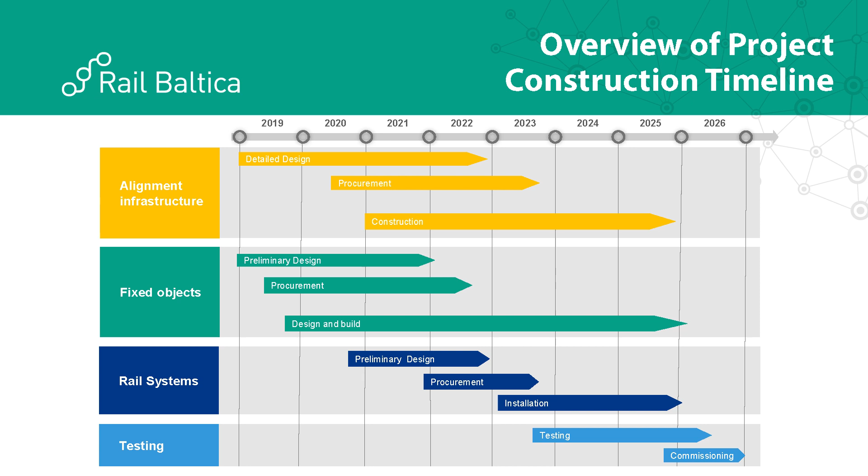And then we get on to the final phase, the testing and commissioning. This will be done in stages, in incremental parts, until we can test and prove the entire railway, and then we can start operations in 2026. So that's an overview of the project as a whole.

Now let me try and explain a little bit about how we're going to build it. As I mentioned, the design really drives how we get to the alignment construction. So let me talk you through that first. So we have alignment design contracts, as has already been mentioned, for the entire railway from Tallinn in the north to Kaunas in the south.

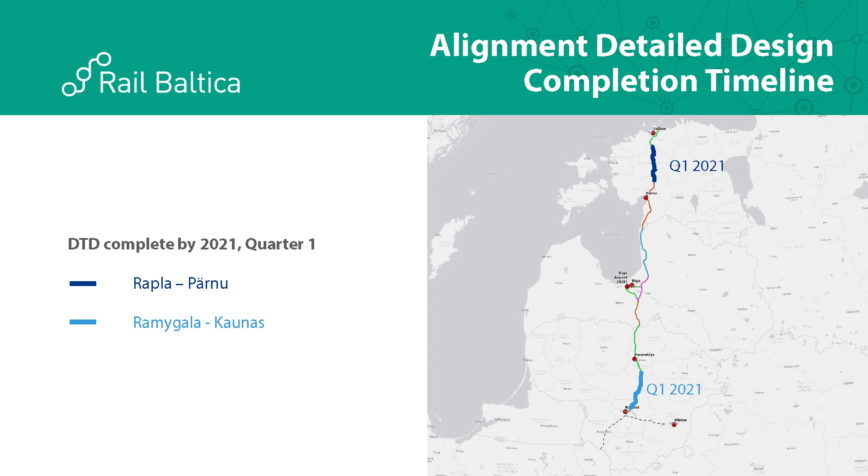The first sections of the detailed technical design, or DTD, will be completed in the first quarter of 2021. This is a section in the south from Kaunas heading north and a section in the middle of Estonia. These are the two areas where construction will commence once the design is complete and we can get the permits. Now, the permitting and approval process varies a little bit by country, so the timing of when we'll start construction will vary a little bit, but these are the first two areas where we'll get going.

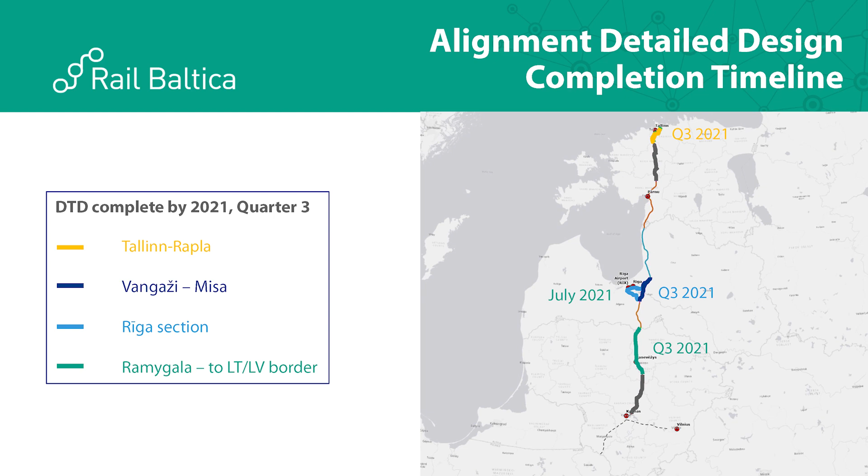6 months later, we'll then complete the design for 4 more areas, 2 in the middle of Latvia around the Riga area, the northern section in Estonia connecting into Tallinn, and then the other section in Lithuania connecting all the way up to the Latvian border. So we'll be moving into the construction phase on those areas in the next wave.

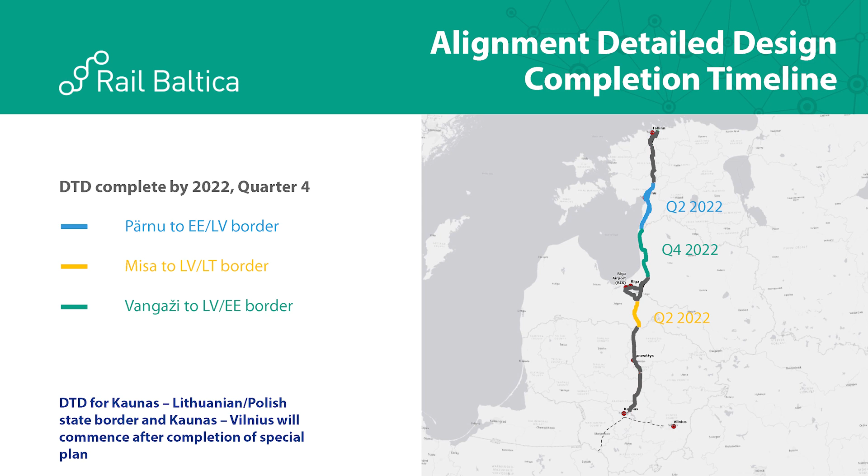And then finally, for the end of 2022, we will complete the design along the entire line from Kaunas all the way up to Tallinn, allowing us to start letting construction packages for the works in the rest of the areas as well. So that's the kind of sequence on how the alignment construction will roll out, starting where the design is complete and then carrying on as the design completes in other sections.

Now, I mentioned this is from Kaunas to Tallinn. There are 2 other sections of the line for which, as Agnes mentioned earlier, special planning is ongoing or is being planned right now. So this is from Kaunas down to the Polish border and also from Kaunas over to Vilnius. So once the special planning is complete for those, we can start the detailed design work and then move into construction on those sections as well.

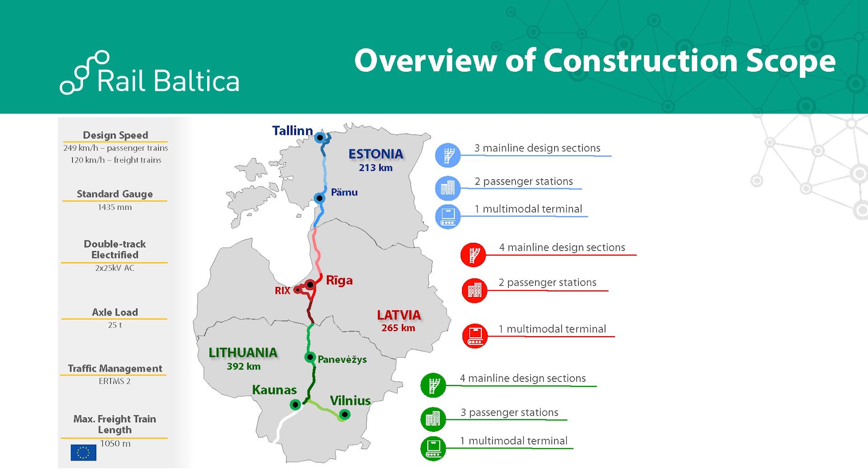So that's how the design work is going for the alignment, but there's a lot more to the project than just alignment. So this gives an overview of the project as a whole, similar to what Agnes mentioned, but maybe in a little more detail. So we've divided the line up into sections, and those are the sections I've just run through. But there are a number of fixed objects as well. 2 passenger stations in Estonia, 2 in Latvia, 2 on the main line in Lithuania, and another one in Vilnius as well. We have multimodal terminals spread along the line, and we have maintenance facilities and control centres as well. So there's a number of different objects in addition to the main line that all require planning, design, construction.

And then of course there's the rail systems. We'll have signalling, tracks, communications and all of the other systems needed to operate the railway. So this is kind of the whole scope of what needs to be delivered in the 3 Baltic countries. But it's not just in the Baltics. Rail Baltica connects to Poland and to the rest of Europe as well.

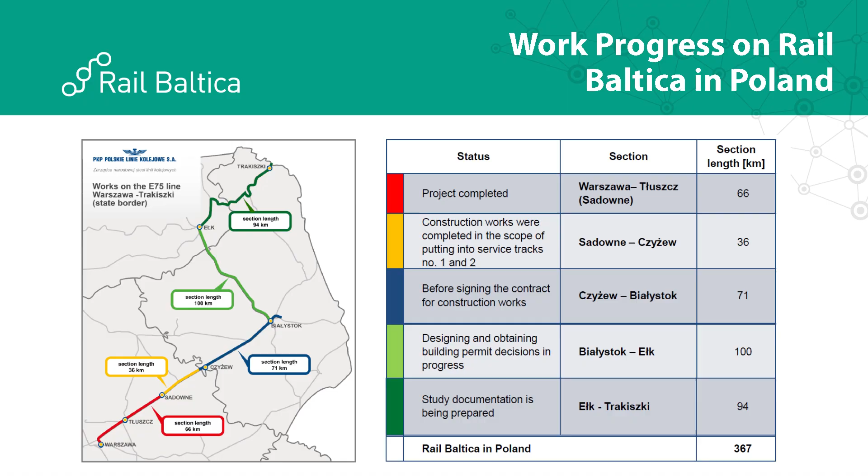And so in parallel with what we're doing, our colleagues at PKP PLK are delivering the Polish elements of Rail Baltica, and their work is progressing really well. The first section from Warsaw northwards is already complete, and planning and construction is ongoing for the rest of the line. They have about 360 kilometres of alignment to deliver, and it's well underway. It will connect at the border, allowing trains to run all the way from Tallinn through to Warsaw and beyond into the rest of Europe. So this is a key part of the project. It's the link to Warsaw and beyond.

Now we're working closely with our colleagues in Poland to ensure that all the interfaces at the border work, the signalling system works across the border, power supplies are uninterrupted and so on. So trains can run effectively all the way across Europe.

So for the bit above rail, the systems that we're delivering, we're currently in the stage of developing all those systems, and they'll lead to contracts for system-wide systems as the design progresses. But the bit that requires the main focus now is the infrastructure. So from the track down, that's where the focus is, the construction side, and that's where the design focus is right now.

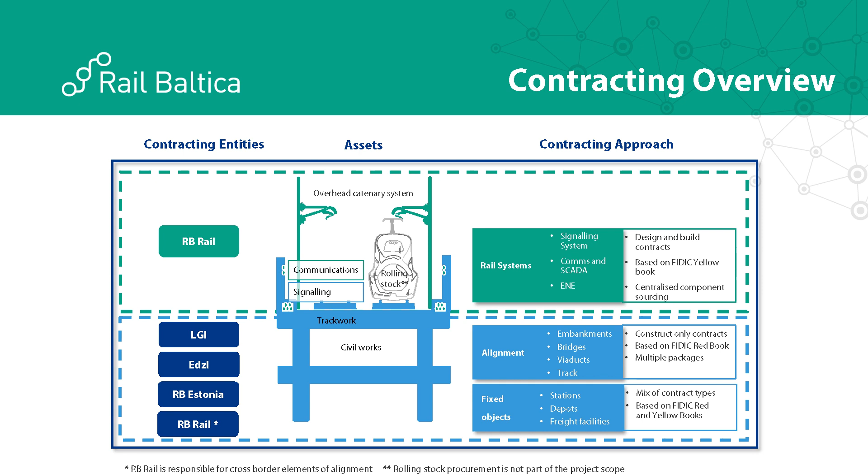Because of the scale of the project, we've identified the opportunity to maybe do some centralised sourcing of various elements of the project. And these will be centralised through large procurements where they provide benefit to the overall delivery. So RBRail will be rolling out a centralised procurement approach for key elements; these will be things like the track, the ballast, and elements that are repeated numerous times along the line where we can really get some economies of scale.

We started the consultation on this. Last week we had a number of very useful sessions with suppliers of all the different track elements, sleepers, fasteners, ballast and so on. Those consultations have really been useful to us and help us moving forward rapidly in putting together these centralised procurements so we can get these elements delivered to the implementing bodies.

Now, let me switch to what we're doing in the short term over the next 18-24 months in each of the countries. Firstly, in Estonia, the main focus here is fixed objects. As Agnes mentioned, they've started on the stations, the design work will commence on those, and we're going on with a number of other fixed objects as well, freight terminals, depots, and we're also looking at a dry port too. So a big part of the focus in Estonia is going to be fixed objects, but things are going to carry on the alignment as well.

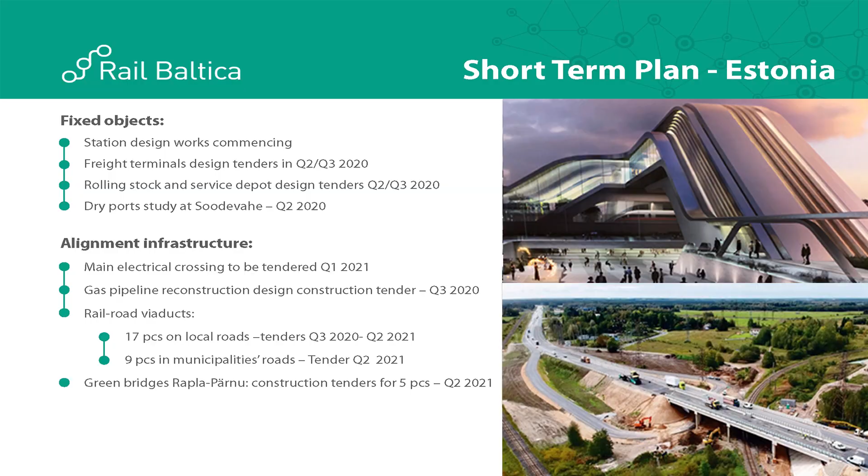Some construction has already started on some railway bridges, and this will carry on. There's up to 17 more that we plan to tender out in the coming months. There are also a few green bridges that we need to get started on as well. And there's some really big utilities we need to get moving on. There's a gas pipeline, there's some big electrical crossings that we need to move as well. So we'll get going on tendering these, getting these utilities moved in the near future as well. So that's what's going on in Estonia.

Let's move to Latvia. In Latvia, the focus is very much on the stations, as has been mentioned already. Riga Central Station is really complicated, and for that, the design and build has already been let and the work's progressing. But there'll be a number of other packages of work needed as well to support that. We will then let the contract for Riga Airport Station, which is also quite complex. Anything linking to an airport is always quite complex. So the procurement for that's ongoing.

We'll also need to procure some supervision services to oversee this as well. And I guess that's something worth mentioning for all the construction packages. In addition to the construction works, there'll also be consulting services which we'll need to provide, some of the engineering supervision services during the construction phase as well.

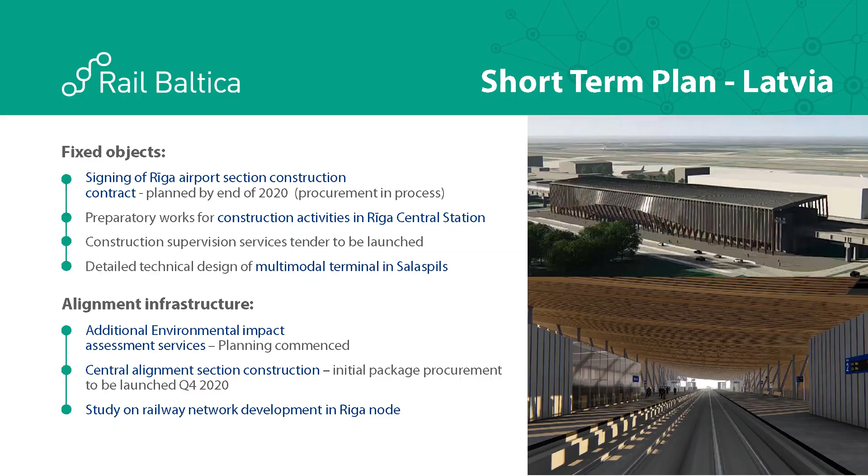From the alignment point of view, we've been doing a lot of value engineering on the alignment in Latvia, and there are a few areas where we think we can provide a better solution. But if we do that, we'll need to reassess environmental impact as a result of the changes. So we're going through that phase at the moment. But the alignment in the centre section, we're getting close to being able to start construction. And so some packages where the design isn't going to change, we'll be able to start the procurement process by the end of this year.

Then finally, in Lithuania, as you heard from the Minister, the work here has already started in the Kaunas area, and there's a section under construction, which is great news. There's more development going on around the infrastructure maintenance facilities in these areas and everything else at Kaunas node.

So that's really good to see. Work's going to start on the main line from Kaunas going towards the Latvian border next. You may have noticed in the news last week, the Lithuanian implementing body LGI has started this procurement process. They started doing a market consultation on the first lot of this, which is around about 475 million euros worth of work. There are 9 lots planned to be let for the first 59 kilometres of this alignment.

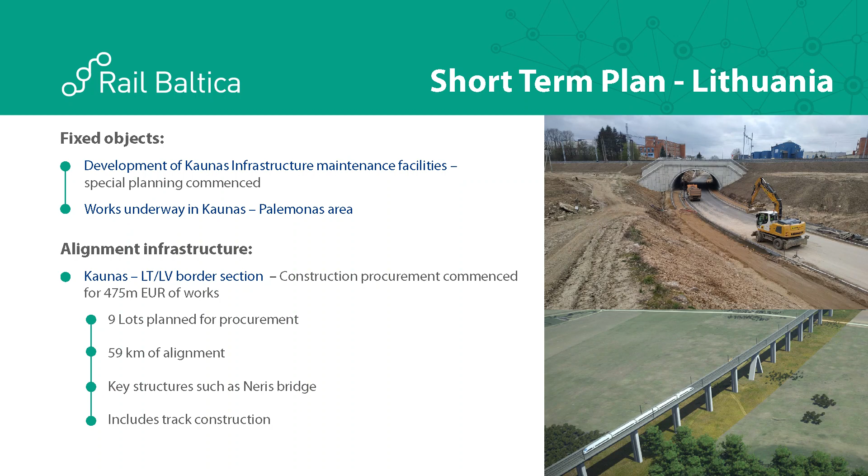Most of it's embankment and a few small structures, but there are some other structures as well, including a bridge over the Neris River, which will be included in here. And as I explained before, to use this infrastructure, we've also got the track installation as well. So within all these packages, there will also be a package for the track installation. So as you can see, the alignment is moving forward fast, and the procurement phase is really starting on construction in that area.

So that's it for the civil elements. Now we turn to the rail systems, which are moving fast as well. Recently, we launched a tender for the engineering services for the ENE, the electrical supply system, overhead lines and so on. Later in the year, we'll be doing the same thing for the rest of the systems, the ERTMS, the communication systems, and all the other rail systems that are needed to operate the railway.

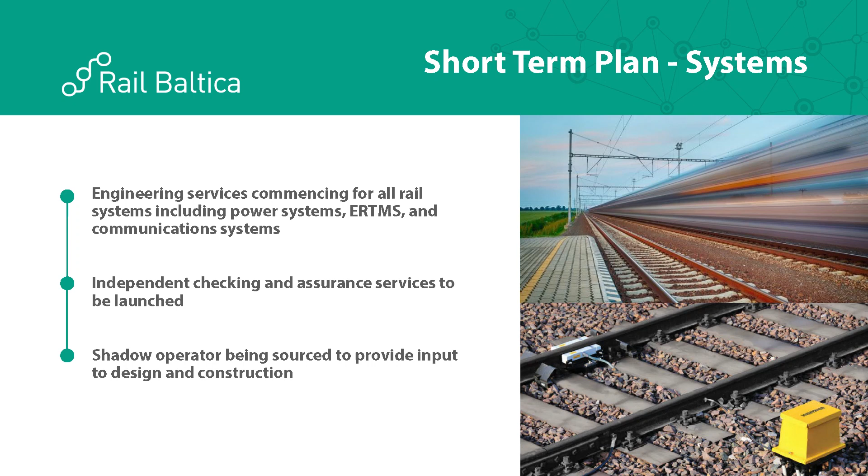We're also getting on board all our assurance and independent checking. So we've been out to tender for a NOBO, and we'll be doing this with other areas going forward later this year as well. The other thing we want to get on board is a shadow operator to help us to provide some operational input into the design and construction of the railway, and so we'll be seeking one of those in the near future too.

Finally, I'd like to come on to the subject of one of the questions, the different contracting options that are under consideration. There are three different ways we're looking at contracting for the main construction works. The first is using a traditional fixed price lump sum approach, which applies very well where you can have a clear definition of scope. The scope's not likely to change and everybody can really understand risks at the point of bidding. The second is a remeasurable approach, where with a bit of a twist, we can add in a target price, but I'll talk a little bit more about that in a moment.

And then the third option we're looking at is more of a prime contractor approach, where there are benefits that can be attained from grouping packages together and letting one overarching coordinating contract to deliver all those packages. So let me run through them in slightly more detail. First, fixed price contracting. This is fairly well known and straightforward. At the tender stage, we provide details of what needs to be constructed.

The tenderers then have to go and estimate the cost of that, what their overhead is, and what risk margin they want to put on, what profit they put in, and then they give us a price for building it. We don't normally get the breakdown, we just get the total amount, and we don't know how much they put in terms of risk. Could be 10%, could be 20%, who knows. But as the client, we end up paying that total risk margin, whether the risk occurs or not. So if it's a risky kind of area, we can end up paying too much. The risk largely sits with the contractor.